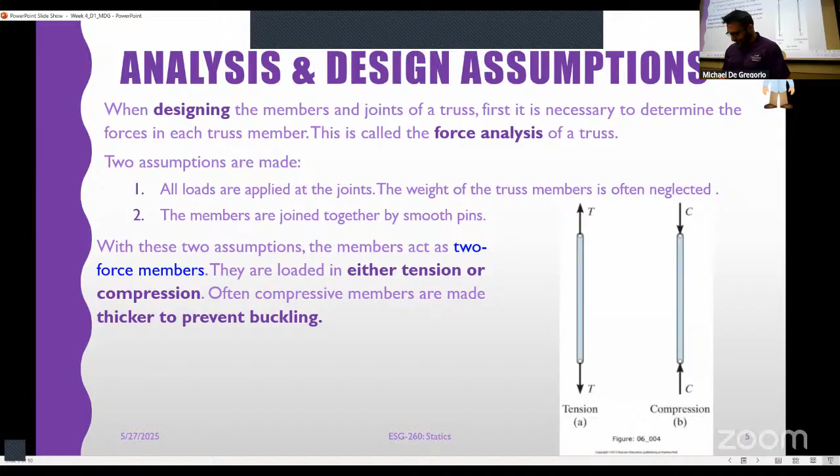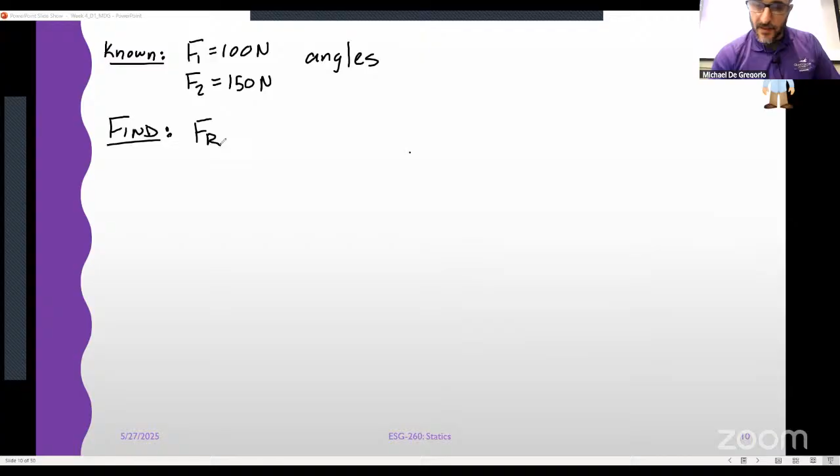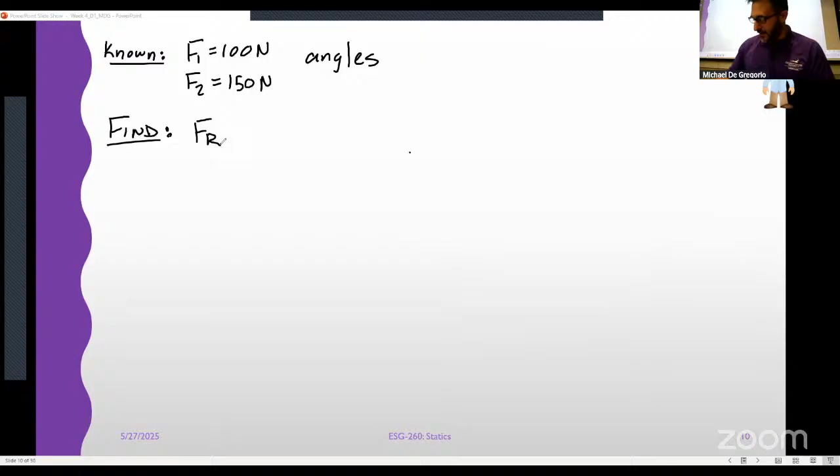What were we looking for? Our unknowns, or what we were looking to find, is the resultant vector. There's two parts to a resultant vector: we need its magnitude and its direction. You can write it in the Cartesian or rectangular form with the ij components listed out, or you can go a step further and find the magnitude and the angle from one of the axes. Either way is fine. Free body diagram.

Well, let me do it this way. Here's my point. That one was F1. Here's F2.

We know that that is 15 degrees, and this is 10 degrees. I think that pretty much does it. Just for completeness, rotations aren't going to matter here, but there we go. So if you had this or some version of this drawn on your paper, good job. You did it. You got 10 points.

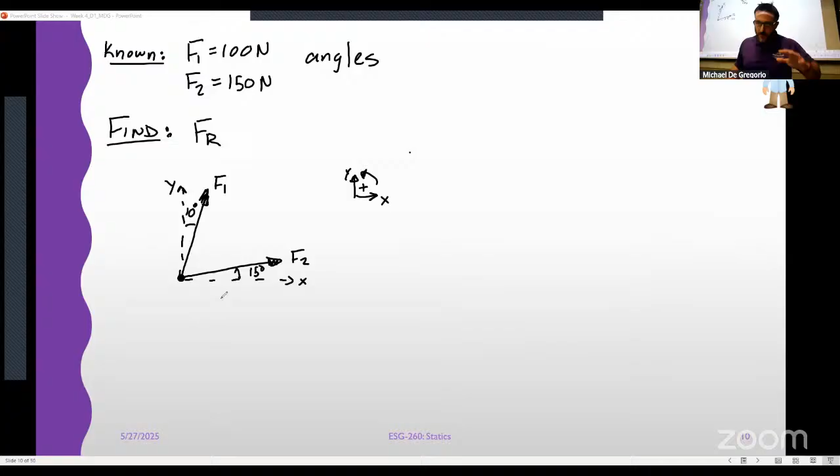Okay, so then the analysis part. So what do we do if we want to get the result? There's a couple ways you can attack this, right? You can write out what the force vectors are in their x and y components, and then sum the force components in the x direction and sum them in the y direction, and then put them all together. You can list what the vectors are individually. You can solve F1x.

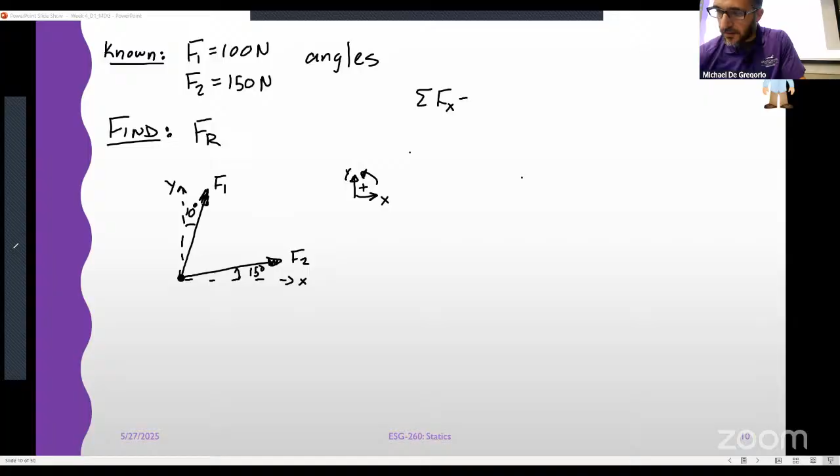The way that I did it was I started by summing the forces in the x direction. And I said that if I sum the forces in the x direction, I get a... well, I'm going to start by summing the forces in the x direction. Start with my x direction. So I've got F2 times the sine of 10 degrees.

I guess F2, I have F1 and F2 confused here. Let me just double check. Yeah, I wrote them backwards in my drawing. Oh, minus a point for Dr. D. One, there. There we go.

Some of you went the extra step and just made that 80 degrees from the horizontal because you didn't want to deal with having different sine and cosine, right? Because your OCD is showing. That's fine.

And then if we look at the y components together, we get... okay. So now we have everything else.

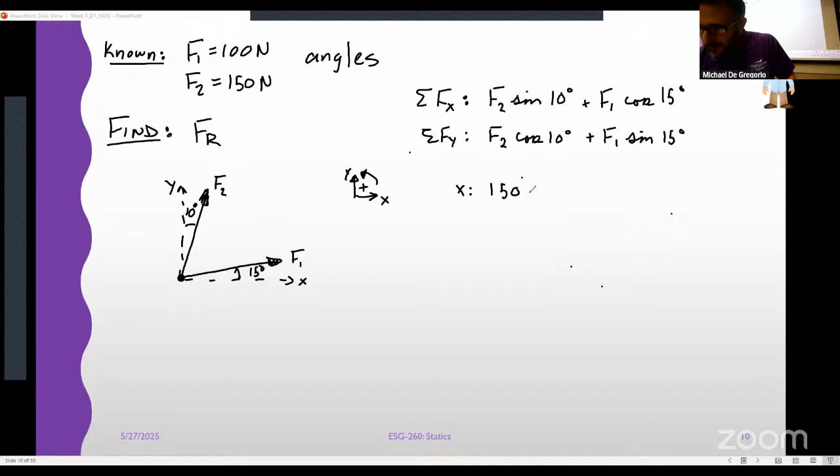Now we just plug in the forces and solve. So if I look in the x direction, if I plug in, I have 150 sine 10 degrees plus 100 cosine 15 degrees. You put those in your calculator, hopefully it was in degrees, and you get 122.64 Newtons.

Do the same thing in the y direction, and you will get 173.6.

I am carrying to 2 decimal places for now, and that's fine. I did not specify how many decimals. If you rounded up to have just whole numbers with no decimal, that was fine. Again, I am less concerned—I said this the day before the quiz—my concern is less about you getting the correct answer and more about me understanding your thought process. So small mistakes, say you kept F1 and F2 flipped, I would have taken off a few points, but the rest of my solution is correct based off of that change.

All right, so now last step, we got to put it together if I want the resultant, and I do, because that's what I was asked for. And I'm going to take the easy way here and call it a day.

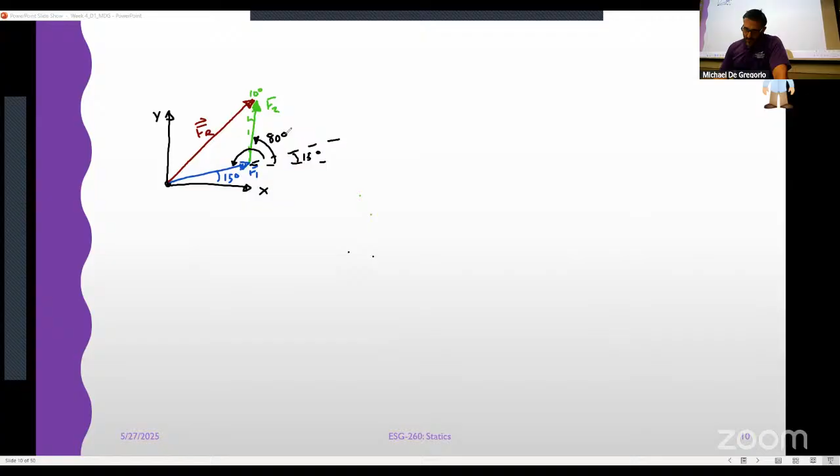Okay. Why is that important? Because it lets me get this angle in here, which is 65 degrees, because it's 80 minus the 15. Then 180 minus the 65 gets me the angle in between the green and the blue. So from here to here, that should be 180 minus 65, which is 115 degrees. So you have to kind of piece together what the angles should be.

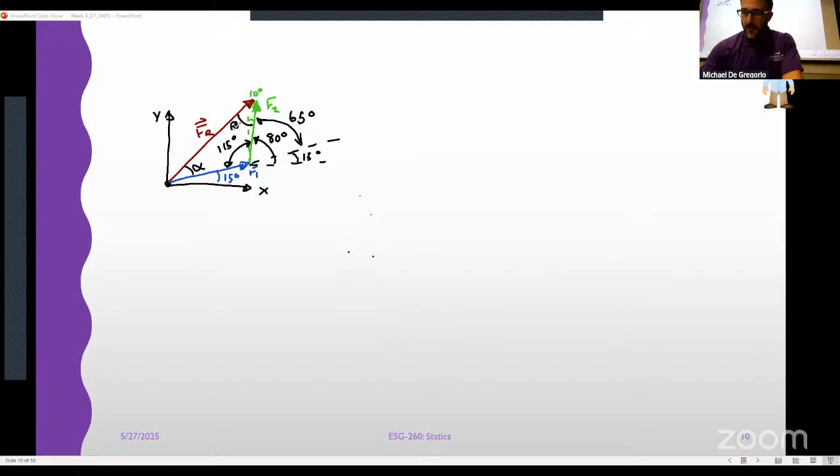Everybody tracking, making sense? We good? I'm going to label this one alpha and this angle up here beta. Then if we want the magnitude, FR, we can find it directly using law of cosines. I'll call that gamma. So what are A and B? A is F1 and B is F2.

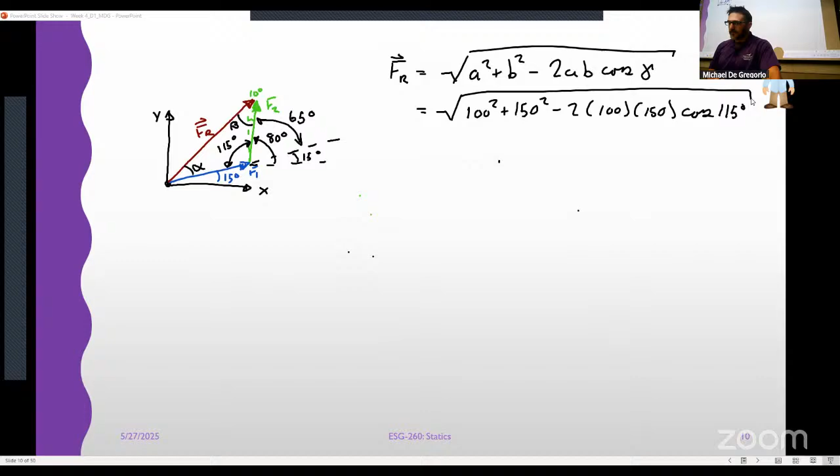Notice what happens when the angle is 90 degrees. You get Pythagorean theorem. That's law of cosines. And if you plug all that in, you get 212.55 Newtons, which, like I said before, if you go back and take our original vector, 123 and 174, square root of the sum of the squares, you get 213. Then we need the angle.

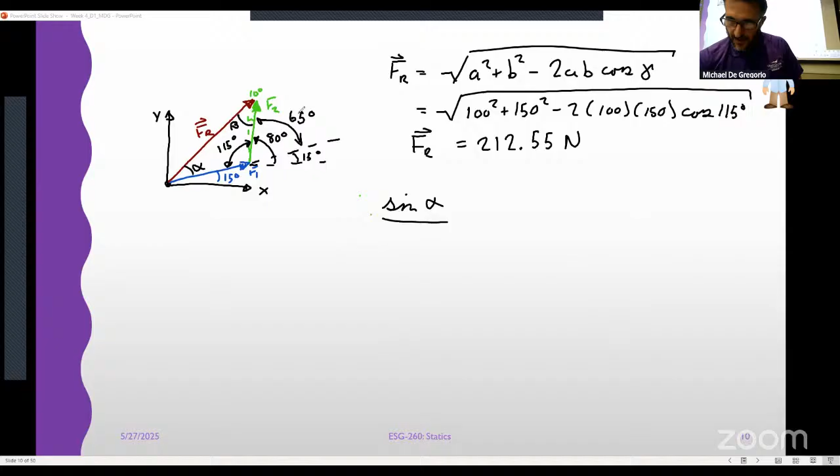So what do we need? We need alpha plus the 15 degrees, right? So how do we find alpha? Well, the sine of alpha divided by F2 is equal to the sine of 115 degrees divided by FR. Law of sines. We can solve this for sine alpha is F2 sine of 115 divided by FR, or alpha is the arc sine of...

F2 is 150, sine of 115 degrees divided by 213, and that should give you 54-ish degrees. No, sorry, that will give you 69 degrees. No, wait for it. Let's just do it. Okay, there. So that will give you 40 degrees.

And then you add the 15 to it to get the full angle, right? Because this is alpha, which is the angle between the F1 vector and the resultant. But if we want it from the x-axis, we need to add 15, which gives us 55. There we go. Great success. We did it.

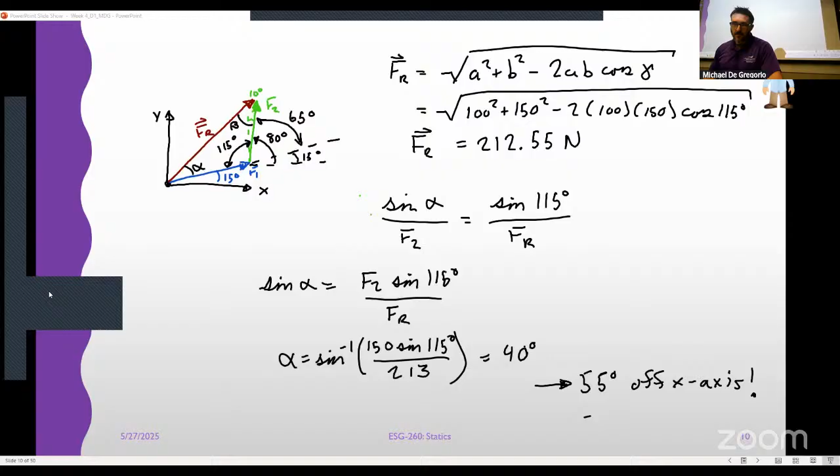Well, here's the second question then. Surprise, surprise, there is a 3D equilibrium problem on here. Not really a surprise; you should have expected this. And to boot, it's one of the ones that's going to need us to use unit vectors, maybe. There's a second way you can do this too, and that's fine.

So figure 2 shows you a package that weighs 500 pounds. The issue is that none of our engineers can determine the force in the cables that will allow for static equilibrium. Your mission is to determine these forces. So you need to figure out the force in the cables. This one was worth 65 points. Lots of points on the line for this problem.

Bless you. So where do we start? Well, first thing I asked you for was the knowns, like we start every problem. We know that the weight is minus 500 k pounds. And we know distances, not angles, just distances.

Things that are unknown or that we're being asked to find are the force in CA, the force in CB, and the force in CD. Okay. Next, we were asked to draw a free body diagram. Here's point C. We have our weight. That's going to be pointing straight down.

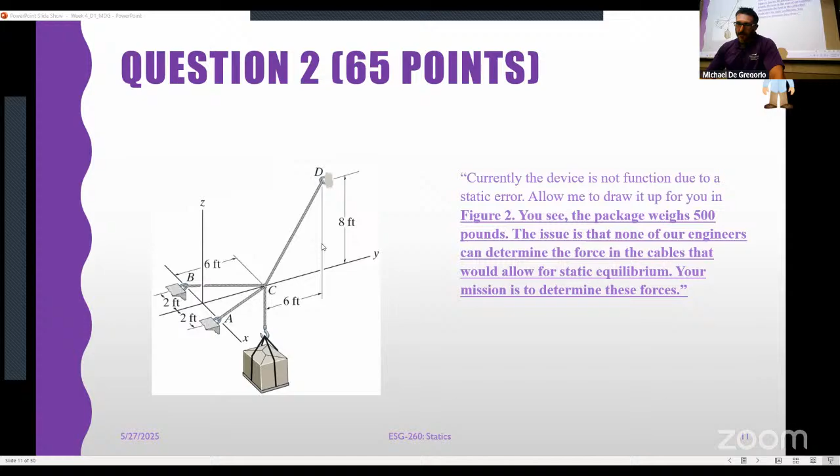Okay, that's great. Now what? Well, you can do this a couple of different ways. I opted to do it with unit vectors, which is how I'm going to show you how to solve it right now, okay? Which is also the way that we would have done it in class. However, some of you noticed that all of these are in a single plane. They're not, right? This is just in the YZ plane. This is just in the XY plane. And so some of you did it the trig way, because you can identify all of those. Because there's a 0 component for each of the forces in those directions.

But I will tell you that it takes about the same amount of work to do it either way, right? Because if you're going to do it correctly with a bunch of 2D drawings, you really want those FBDs in 2D. Otherwise, you're not going to stack your vectors correctly.

Okay, so I started by developing the unit vector for CD, which is the distance from C to D divided by the magnitude of that distance. If I'm going from C to D, there's no travel in the X direction. I have to go positive 6 in the J and positive 8 in the K, divided by the magnitude of that. The square root of 6 squared plus 8 squared is 10. Divide by 10. And so our unit vector, I'll write it up here for tracking: 0I plus 0.6J plus 0.8K.

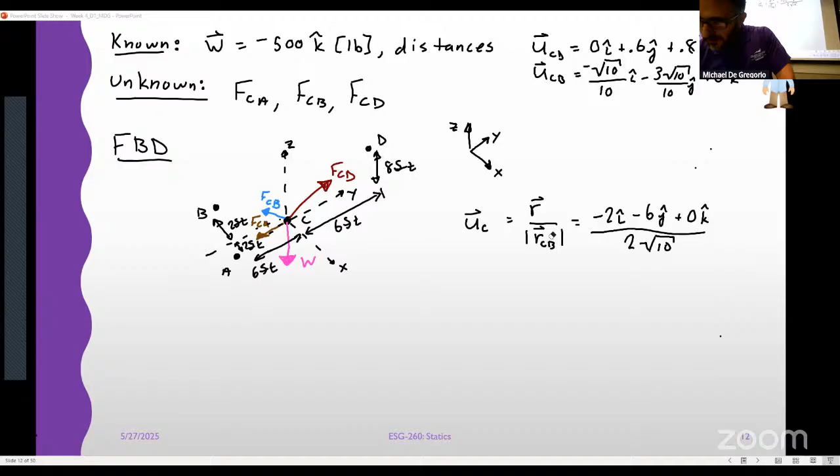Okay. And then guess what? We'll do A now. The fun thing about A is that that vector looks pretty much identical to the CB one, with the only difference being that it's positive in the x direction instead of negative, because they're in a line together, right? That's it. And so really we can just take this guy.

No, you're not gonna let me do it. Come on. Come on. That would have been so good. Apparently copy and paste is off the table in Zoom. I'll write them a message about that.

And the last, yep, and that's it. Those are our unit vectors, right? Cool. Everybody cool with unit vectors for that so far? Again, if you didn't do it with unit vectors, it doesn't mean that you didn't do it correctly. There are other ways to solve this. If you really wanted to do it with trig, you could have. But I would argue that it's roughly the same amount of work either way. Okay. Nothing? No questions so far. We good?

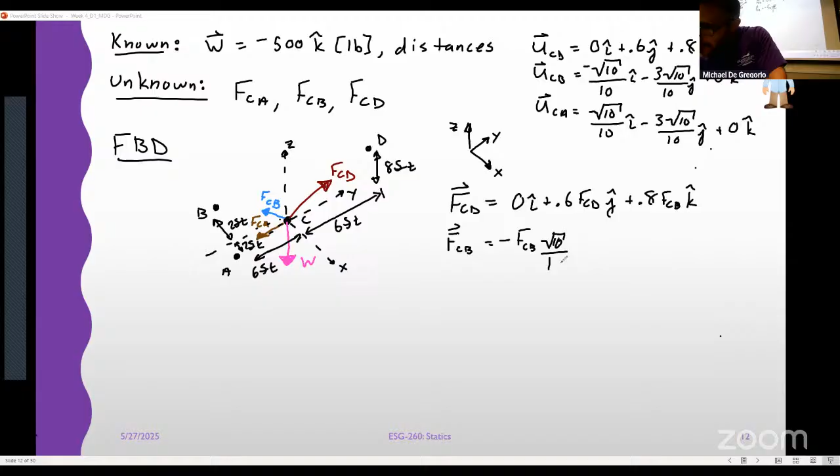So if I want to write down my force vectors, FCD should just be, let's see, 0 in the I plus 0.6 FCD J plus 0.8 FCD K. And we'll do the same thing for FCB, which would be negative FCB root 10 over 10 in the I minus 3 FCB root 10 over 10 in the J, K was 0. Okay.

Hey, Matt, a little loud. All right. Thanks.

Okay, same deal, going the other way. This one should look real similar to the one we just wrote down. The only difference is that the x component is positive. And the final vector that we need is our weight vector. Not negative 1500, but negative 500. Well, let's write it out just like the other ones for fun. 0i, 0j, minus 500k. Right, and these are all in pounds.

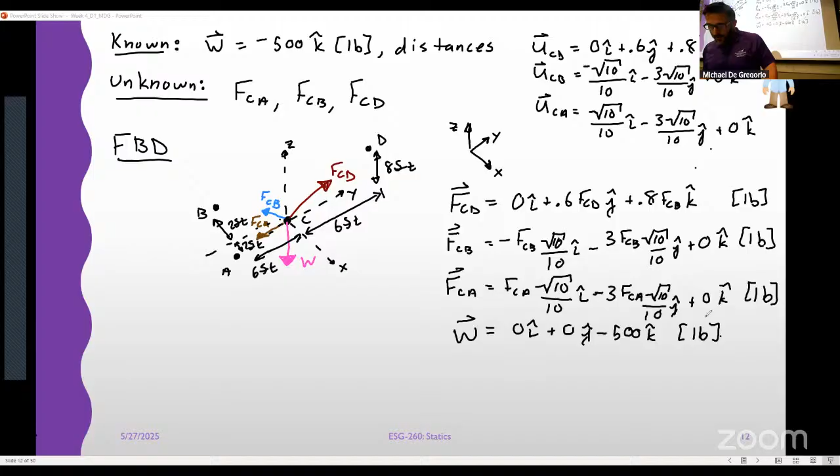Now we're ready to go, right? We've got everything set up the way we want it. Sum of the forces in the x direction, sum of the forces in the y direction, sum of the forces in the z direction. I'm gonna erase my FBD for now, so I have a little room to write the rest of this stuff, and we can still see the vectors.

So if I sum my forces in the x direction, I get negative FCB root 10 over 10 plus FCA root 10 over 10. The root 10 over 10 goes away, right? And so I just get FCA is equal to FCB, right? Keep that one as equation 1, moving along to F in the y direction. Looking down, this one's going to be a little bit more convoluted, right? But it's

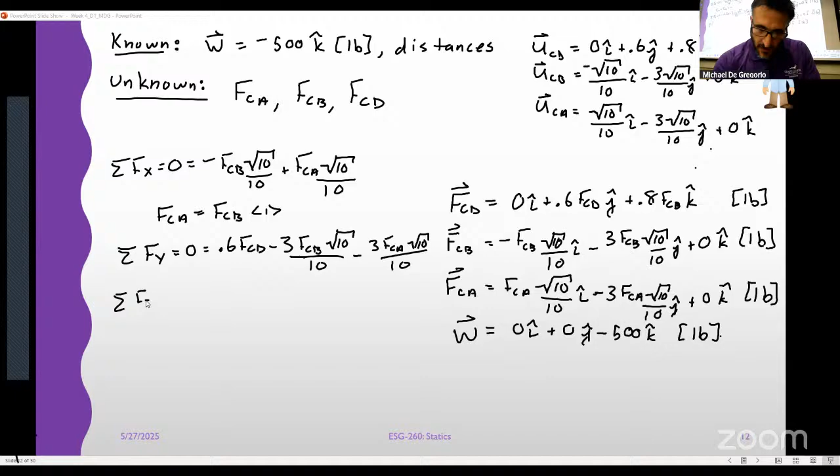okay. Yep. 0.6, yep. Nothing in the J there. We're going to leave that for now because there's really nothing I can do with it. But the next one, FZ, will be really nice because I only have two things in the K direction. I've got 0.8 FCD and the weight, minus 500. So we can solve that right away. FCD is 500 divided by 0.8, which is 625 pounds. That'll be pointing up to point D, from C to D.

Okay, we go back, right? We're going to have to do a two-part substitution into equation 2 over here. Pick whichever one you want to sub in for, A or B, it doesn't really matter because they're equal. So I subbed in FCB with FCA.

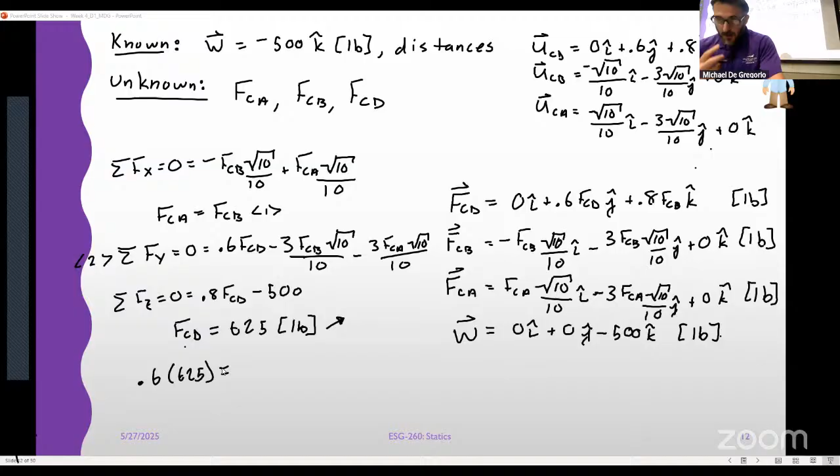If you do that and rearrange some things, you get 0.6 times 625 is equal. Then I move the other two over to the right-hand side because they're both negative. If I make them positive, and they're both FCA, I end up with 2 times FCA times 3 root 10 over 10.

You can say, well, why didn't you just make it 6 root 10 over 10? Could have done that too. It turns out that if you solve this for FCA, you end up with 197.64 pounds. Notice it came out positive, so we assumed tension correctly. FCA should be going towards point A, and FCB is just equal to the same thing, 197.64 pounds, headed in that direction.

And there you have it. Pretty straightforward, right? Again, if you wanted to do it with trig, you could totally do it with trig and it works out fine. Questions on that one?

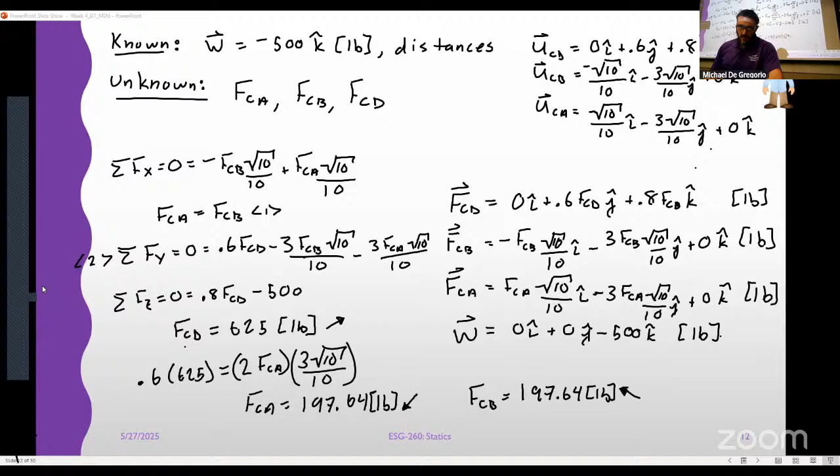Okay, this one's 30 points for a bunch of unit conversions. The biggest mistake I've seen so far is just flipping the conversions, not multiplying when you're supposed to divide, or dividing when you're supposed to multiply. That's the biggest thing I've seen so far.

Let's start here. Water has a density of 1.94 slug per cubic foot. Also, I'll show this off: pound per square foot is not the same as PSI. So if you solved this in PSF or PSI, I gave you points for it. I did not, because I messed up, so that's an error in your favor. There are two possible answers for this conversion because of that mistake. That does not extend down to part B, because there's a direct conversion in that chart that takes you from PSI directly to Pascal.

Anywho, let's walk through it. So we have 1.94 slug per cubic foot, and we need to convert this into density in SI units. What are the SI units for density? In general, what's a density? If I asked you to write the equation for density, what would it be?

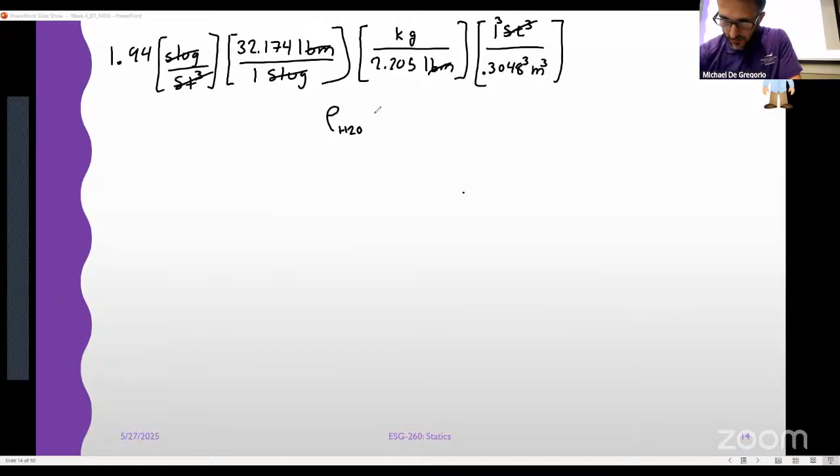When we multiply all of this together, we get that the density of water is equal to roughly 1,000 kilogram per cubic meter, but I wrote it as 999.66 kilogram per meter cubed. If you did it in centimeters, that was fine, I'll allow it, it's a valid measurement. This checks out with hopefully what you guys recall as the density of water from chem, or thermo if you've taken thermo, or really any science class that requires you to use the density of water. It changes depending on temperature and pressure, but anyway.

Anyway, okay, that was the first one.

The next one: the Pascal is actually a very small unit of pressure. To show this, convert 1 Pascal, which is 1 Newton per square meter, to PSI, which I then labeled incorrectly—my bad. Let me get myself some room here.

All right, so if I have 1 Pascal, which is 1 Newton per square meter, and I want to take that to PSI, I'm going to need that to be in pound per square inch or pound per square foot, depending on whether I use PSF or PSI, because Dr. D messed up. So how do we start?

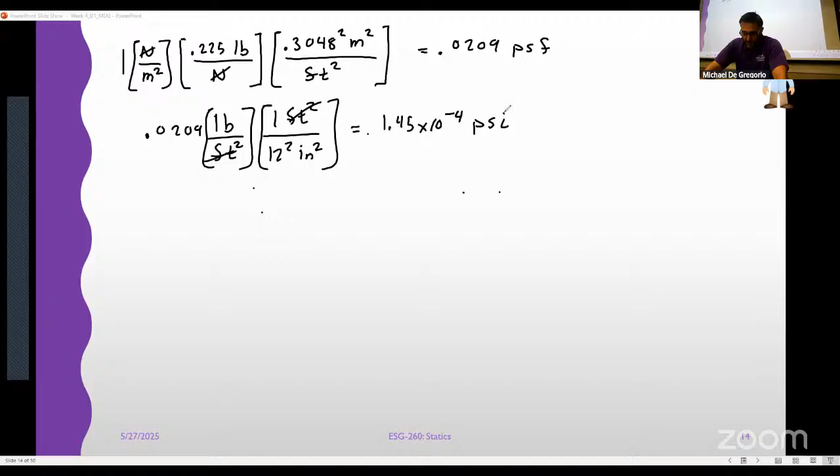The next one, you could either do this in reverse or just use the 6,895 number from the table to go back the other way. I'm going to do it the long way because reasons. Because I did it the long way. Because unit problems are fun.

14.7 in PSI, and I need to bring this to pascals. First thing I'm going to do is convert using the same conversion factor I used above, just flipping it to get rid of the pounds instead of using the newtons. Then we need to convert this from inches to feet. You could go directly from inches to meters if you wanted, but I just used the same things that we did in reverse.

Left with Newton per square meter. This is going to be a really big number, because I'm dividing by something that's a decimal being squared, so it's going to be much larger than 14.7. And in fact, it comes out to 101,270 Pascal, or 101.3 kPa if you're using kilopascal, depending on where you used your truncation. Hopefully that resonates, because if the atmospheric pressure at sea level is 14.7, hopefully you remember that 101.3 is our standard pressure in kPa for air.

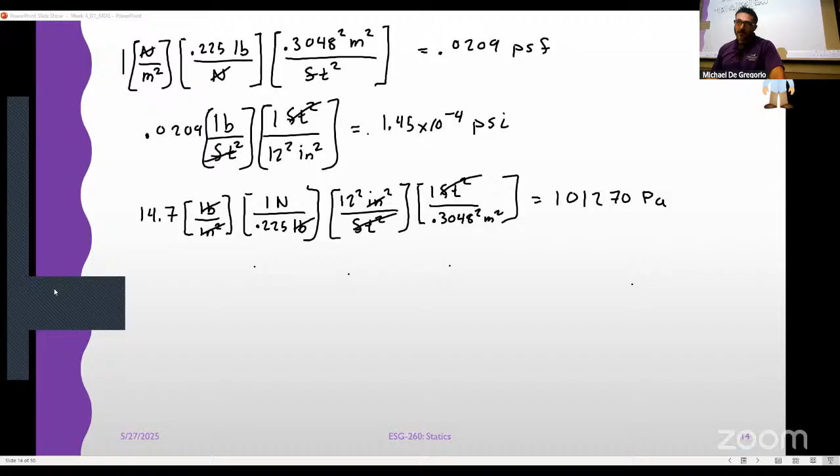All right, these are the more interesting ones now. A man weighs 155 pounds on Earth - that's pounds force, since it wasn't specified as pounds mass. But also, if it were pounds mass, think about how much that person would actually have to weigh in pounds force - it's a ridiculous amount. I'd argue no human has ever weighed 155 times 32.2 pounds. That's pretty excessive, so context clues. I guess it's possible somewhere in the MCU that we could have that.

So we're going to start with 155 pounds, and we're asked to find the guy's mass in slugs. There's one slug for every 32.174 pounds force on Earth - on Earth, that's the important part, that's true, it's going to come into play in a minute. This gives us 4.82 slug, and that's also a nice number for us to just keep around, because we'll talk about that in a second.

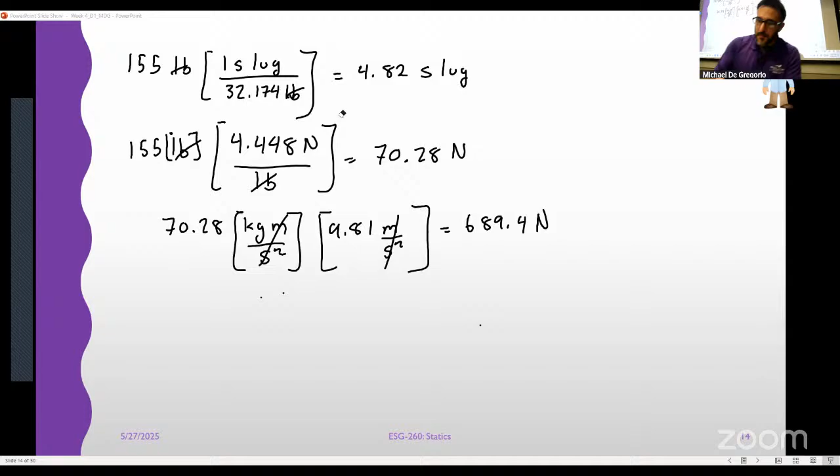And we get 689.4 Newton. I don't know why I converted that way, I did this all backwards. Okay, reset.

689.4 Newton. Take my newtons, 689.4 Newton, I want this. You know that this cancels with our meters per second squared, leaving us with kilograms: 70.28 kilograms. There we go, got it, nailed it, first try, there's no internet record to tell you otherwise.

Okay, last part. On the moon, how much does this person weigh in pounds? There's a couple of things that need to happen here, because now that you've moved to the moon, gravity has changed. You can either start with the 155 pounds, but then you have to remove the 32.2 and multiply by 5.3 to get everything together. Or you could say, I understand that mass does not change no matter where I am, right? And so the mass we found up here in slugs is 4.82 slugs.

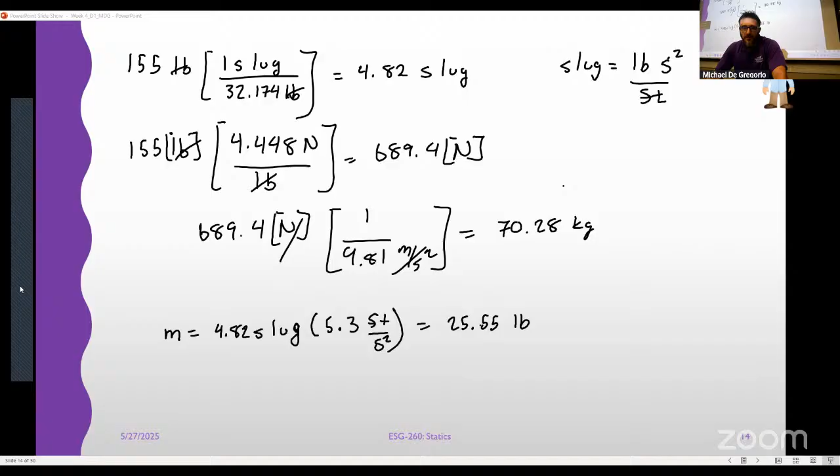And here's the last one, a fun fact about this particular problem. If you took ESG-162 with me, the only time I ever taught it, this was actually a problem on one of your quizzes, pretty much the same, I just flipped what we were looking for, that was it. And the reason I did that is because I told you during that time that this was a statics problem, and it is. It's 100% a statics problem, so I'm just proving it.

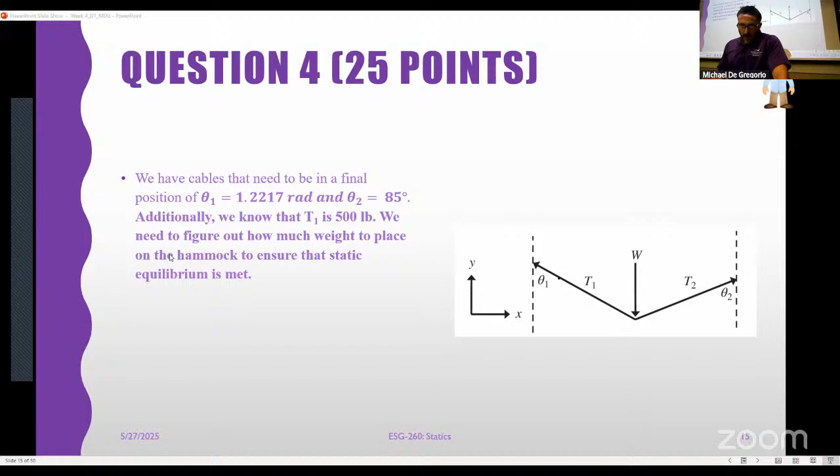So how much weight do we need to place in the hammock? Really we were just asked for W. This one was a little bit different, it didn't ask you for knowns and unknowns in an FBD, it just wanted you to write all the force vectors in Cartesian form. So this was the setup part: we acknowledge we have some weight in this direction, some tension T1 composed of X and Y components, and some tension T2. They should all be in pounds.

If I want to convert that angle, 1.2217 radians, into degrees, multiply by 180, divide by pi, that gives me about 70 degrees, 70 and change, but close enough.

We know theta 2 and we know T1, so let's start with T1, we'll write an actual vector for it. T1 is negative 500 times the sine of 70 degrees plus 500 times the cosine of 70 degrees, I and the J.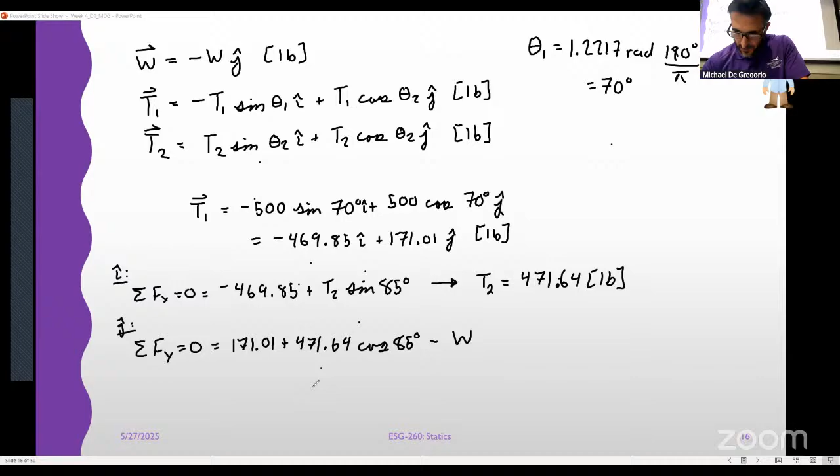And then in the J direction, if I sum the forces in the Y and set it equal to 0, I get 171.01 plus 471.64 times the cosine of 85 degrees minus W. So W, when we solve this out, is 212.12 pounds.

That's the whole thing. That's the quiz. Great success.

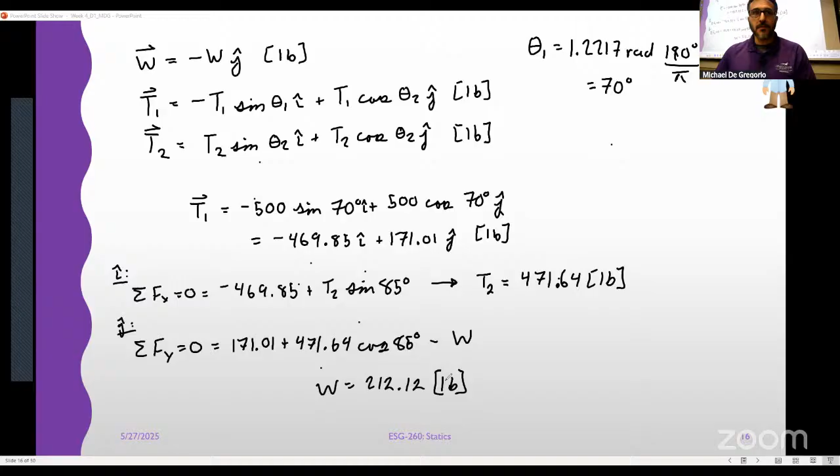When I took the quiz, it took me—I had originally an extra problem on there that I removed. The whole thing with the extra problem took a little over 30 minutes, but here we are.

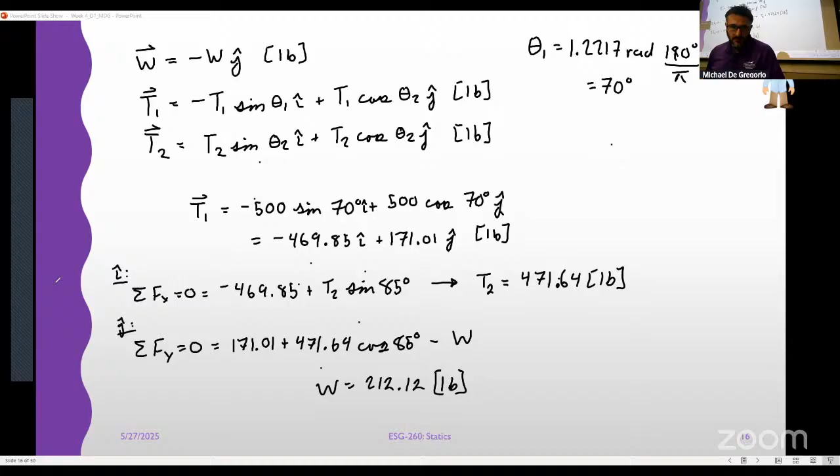All right, well in that case, let's revisit method of joints because it's been a week, and I'm sure you were all very concerned about method of joints over the weekend. But all right, so we have trusses, and we talked about this.

We assume that all of the members are massless, and we assume that they're frictionless pins, and we assume that all of the forces are applied at those joints, which are pins. So if we have a truss that looks like this, and somebody asks us to find the forces in each of the members and tell us whether or not they are in tension or compression, we do that.

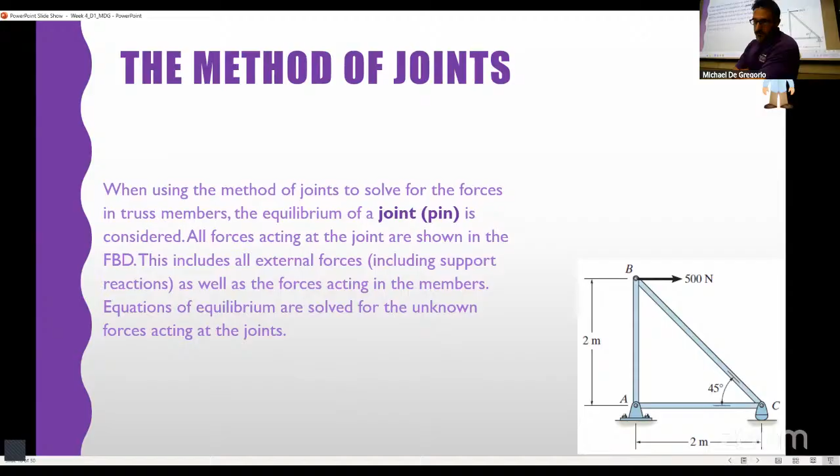By drawing a free body diagram at each of the pins and summing the forces in the X direction and summing the forces in the Y direction. As we treat the pin like a particle, and because we're allowed to rotate around the pin, we don't really worry about the moment. We don't use the moment equation. Also, right, and so that's neat.

If we're going to assume—you notice here that they did not assume that everything was in tension. They drew FBC in compression. That's fine. Again, you can draw them in whatever direction you want, but the typical convention is to assume tension for everything until proven otherwise.

All right, steps for analysis. First, we start with an FBD for the entire system, which allows us to find the reactions and get a global perspective for what the system is doing. Then we do each of the joints.

Which joint? It really depends on you, wherever you want to start is fine. You don't typically have to solve n joints to figure out what all the forces are—you can do n minus 1, but the last joint serves as a way for you to check. So we'll do some of those in a little bit.

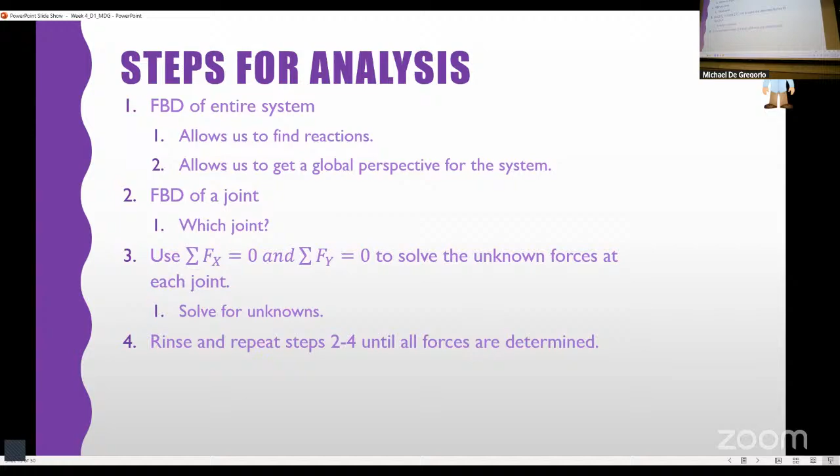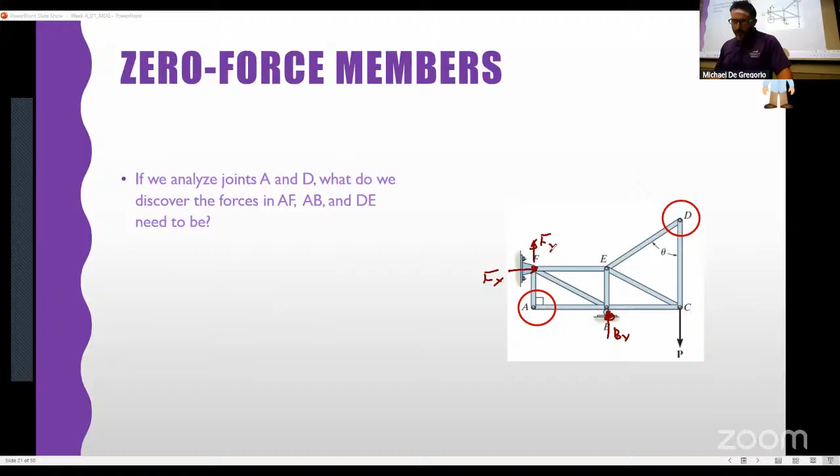Notice that we have a roller at B, right? So a roller at B is going to give us a vertical force or a normal force at B. Let's do this real quick, just to remind us all. Here's BY. We have FX and FY. So what do we have to do here?

If a joint has only two non-collinear members, and there's no external load applied or support reaction at that joint, then those two members are zero force members. So if they're not in line with one another and there's no reaction or external force at that joint, there's no force.

Another way of thinking about this is look at point B. You have a force going up this way, one coming up here, and two coming out to the side. The only applied force at joint B is the reaction that is completely vertical. If I were to sum the forces here in the y direction, I only have two things, two ways this can transfer. In the x direction, the sum of the forces in the x direction is zero. There's no forces being applied in the x direction.

Okay, you can prove these, and we will. In this example, DE, DC, AF, and AB are all zero force members. So DE, again, pulling down at P, straight down. This has - if you look at C - you're going to have Y components here and here, but no...

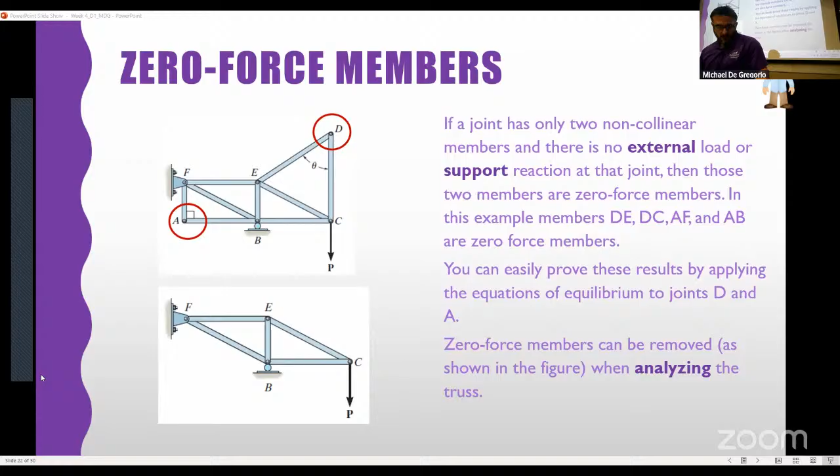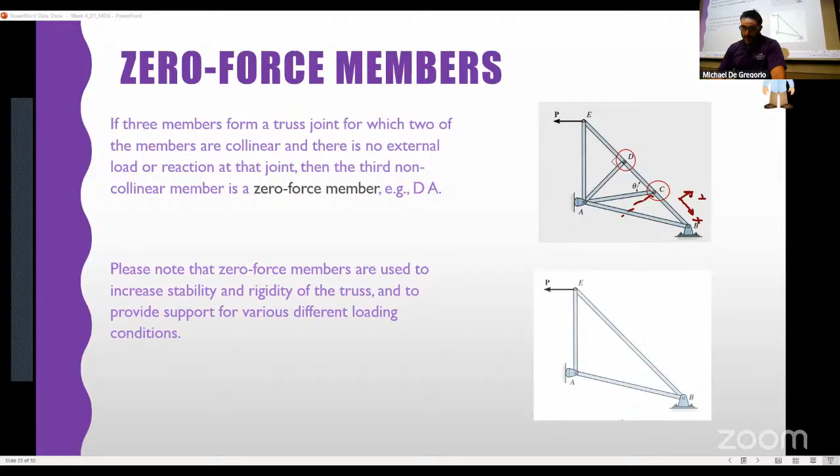So does it simplify things? Yes, if you can do it up front. Is it necessary for your success for solving problems? No, it is not. And if you have any questions about whether something is a zero force member or not while you're working through problems, I would recommend just do the statics at the point and see what happens. Right? That's what I would suggest.

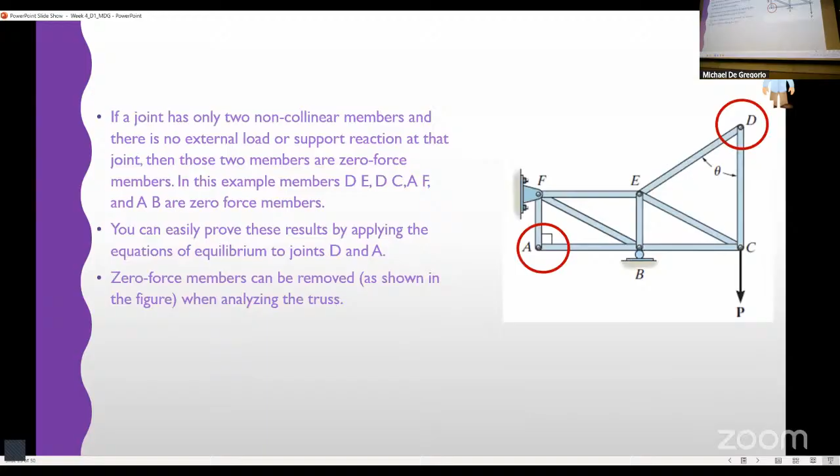Okay. So let's walk through this one, right? We talked about it, but so we're going to analyze D and A, right? Or did we already do this? We already did it. Okay, great. Cool. Let's just do this problem. Where is it? There we go. Very good. Did we do this one last class? Do you guys have this in your notes? Okay. I just want to make sure. No, you guys did this one last time.

Okay. Excellent. So determine the reactions and forces in all the truss members. Do not forget to mention whether they are in tension or compression. All right. This is going to be pretty much the standard for the homework for stuff. It's about structural analysis, right? Trusses. Is this homework four? Yeah, this is the homework four stuff. Okay. So method of joints, method of sections, right? Method of sections next class.

So since this is method of joints, and typically when we're asked to determine the reactions and the forces in all of the truss members, that's going to require us to do method of joints, right? If you're asked to find everything, method of joints is your method of choice. If I want the reaction forces, well, the first thing that I'm going to do is draw a free body diagram for my entire system, right? So I find it easiest to draw all my points first and then connect them. But you guys can do whatever you want.

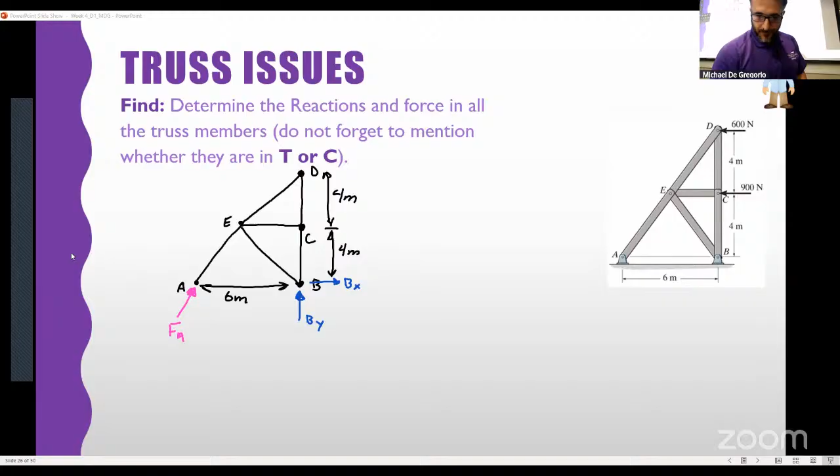Yeah, so we're going to use a trick that comes out in our favor to reduce the number of unknowns. And it's fine. You can do this. It's totally legal. I'm just going to call this FA and say that I know it has to be pointed along the member. Sure, you say so. This is 6 meters. This is 4 meters. And this is 4 meters. We have some applied forces here: 900 Newton and 600 Newton.

All right. So we get three equations, and that's great. I'm going to call one thing out here before I do anything else. Notice that this is a 6, the full total, if you did the triangle ADB, right? That is a 6-8 triangle. Some people would call that a 6-8-10 or 3-4-5. Recognizing that this is a 3-4-5 triangle is really helpful for later. Or you can find the angle if you want. It doesn't really matter.

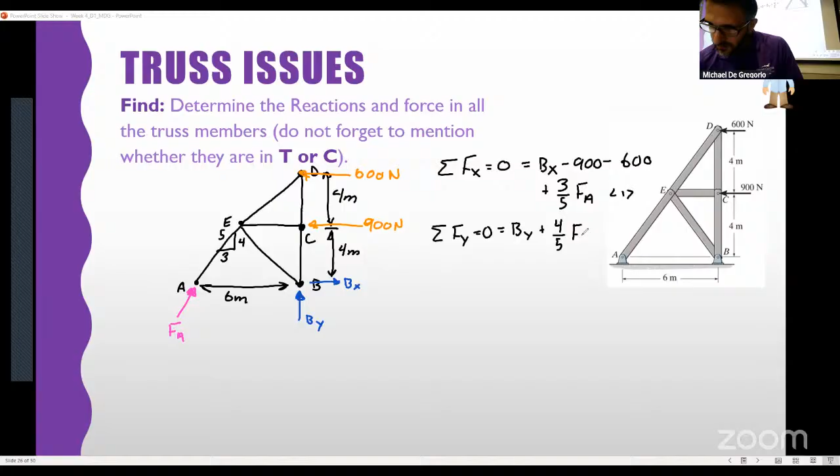So if we're going for reactions, let's start. Sum of the forces in the x direction is equal to 0 is equal to Bx minus 900 minus 600 plus the x component of A, right? And the x component of A is going to be 3/5 of FA. Equation 1. Do the same thing in the y direction using the components. It turns out that we're going to need a moment equation. Where would you guys pick to take the moment?

I use point B. Using the De Gregorio principle of where to pick moments, I pick point B because Bx, By, and FA in the x direction all pass through point B, eliminating 3 of my forces. Okay, if I want the moment established by 900 newtons, that's positive 900 by 4, because if I were to push with 900, it goes in the positive rotation direction. Same deal with the 600, also positive, but that one is 8 meters away from point B. And then the final one that we have is A.

A pushes up, right? So that's going in the negative direction. So we will subtract the y component of FA times 6 meters. We can solve this right away for FA, and that cracks open the rest of the problem. So that gives me 1750 Newton. It's 900 times 4 plus 600 times 8 divided by 6 times 5/4, obviously 1750. I mean, it's like asking what 2 plus 2 is. All right, easy. This came out positive, so it is in fact directed up and to the right. Okay.

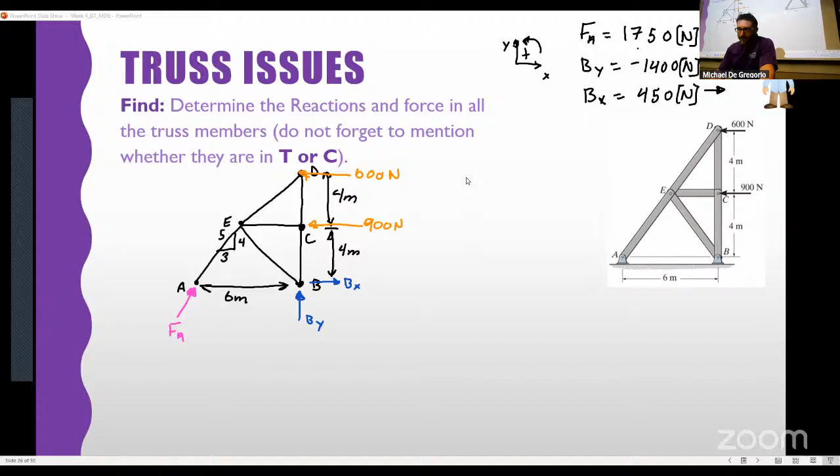C has 3, so C is probably not the best one. We know that's not a zero force member right off the bat because there's a force at C and 2 that are collinear, so all of these have to be taking load. D has 2, so B and D are looking pretty good. E, not so much; E's got 4 different forces. You could go A, but A's only got 1, so it's not interesting. We're pushing along A; all that force just goes right up to E. FA is FAE. I started at D, but you can start at B for sure. All right, so let me draw my free body diagram at D.

Here's joint D. I'm going to have FDE coming down this way, named cleverly because it goes from joint E to joint D. I'm also going to have a force that comes straight down called FDC. And we have an applied force there of 600 Newton. And just to remind ourselves, X and Y in these directions.

Okay, we don't know either of these forces, so let's start with our sum of the forces in the X direction. I'm going to sum the forces in the X direction, set that equal to 0, and that's negative 600 minus, well, we know this is that same triangle that we're using before. This is a 3, 4, 5 for sure. So that's got to be 3/5 of FDE. So we can find FDE right off the bat.

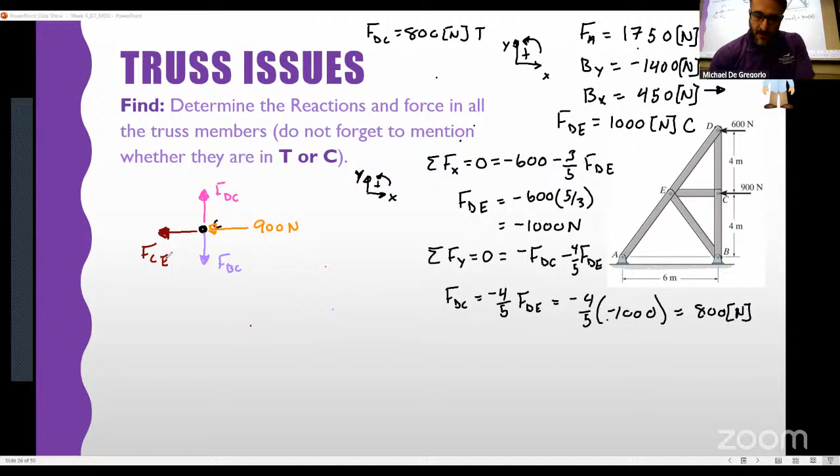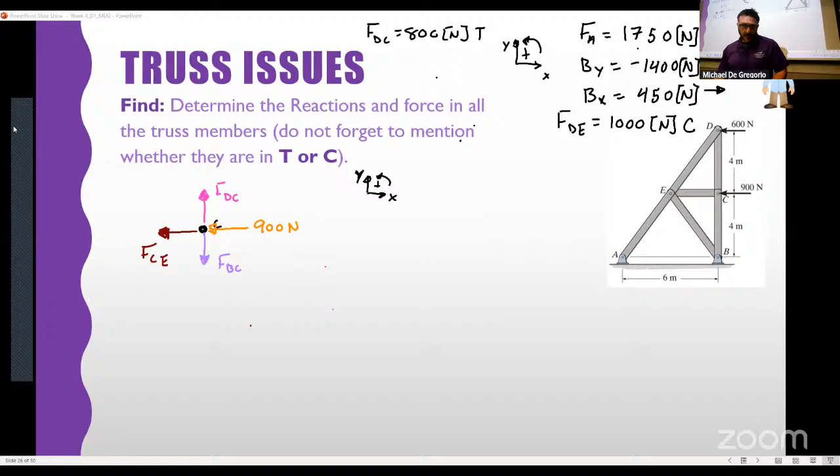This one is a pretty easy one if you're just looking at it, right? Because FBC should equal FDC, and FCE needs to counteract that 900 newtons. The X component, since it's pure X and pure Y, it transmits in that way, right? And so if we were to do the math, which we will, because that's kind of why we're doing this. I should probably go to the next slide so I don't have to keep truncating what I'm writing.

So let's sum the forces in the x. Negative 900 minus FCE. That's in compression, right? So write it down up here. Notice that when I report it, I don't report the positive or the negative. I'm telling you, hey, it's compression or it's tension. That's enough to understand. So that means that that's actually pointing the other way, which makes sense because, again, two of the members are completely north-south, two are completely east-west. They have to balance each other, right?

So if we sum the forces in the y, we get FCD or FDC. Let's call it FDC, I guess. Minus FBC. So FDC is equal to FBC, which makes it 800 newtons in tension. So far, we have this guy, and this guy, and this guy, and this guy.

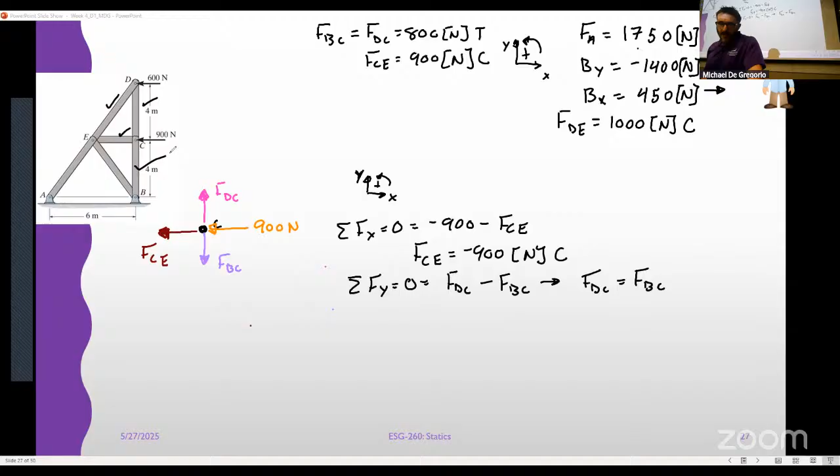All right. So now, and I would also argue that we have FAE, but we'll use that as a check in a second, because I'm gonna go to joint E now. Why am I gonna go to joint E? Because I can just finish this right off the bat with joint E. Joint E is going to require us to make an assumption that's not drawn here, but we're going to assume that that is 3 meters, so that this triangle is also a 3, 4, 5. Yeah.

How would I know to do that otherwise? I mean, you're kind of forced into it at this point because there's not enough information given. Based on the way this is drawn, I think it's a reasonable assumption, right?

Could you do all of the geometry? I mean, yeah, you could, right? You could figure out this angle and then know what that angle is. Then you can use this angle because you know that these two angles are the same. And so then you know that this has to be 90 degrees maybe, right? I mean, you can work your way around to figure out what the actual angles are. I think it's just safe to assume there's a 3, 4, 5.

4, 5. All right, so let's draw the picture of the free body diagram.

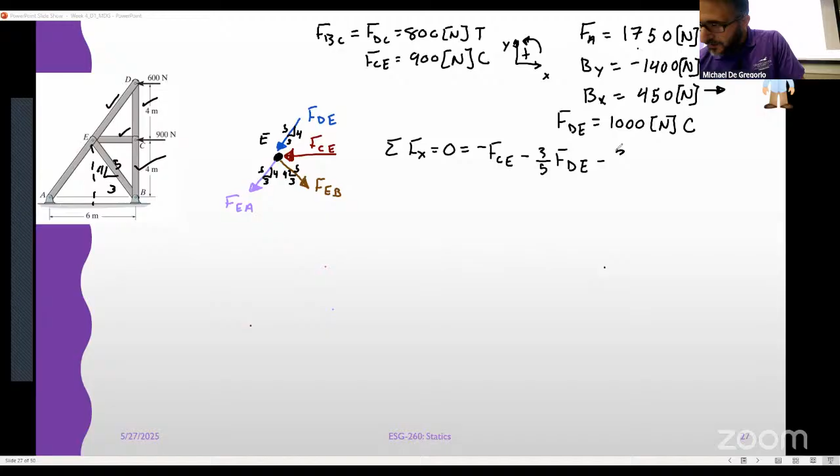So now this is going to be a lot more trig, right? We have negative FCE minus 3/5 FDE minus 3/5 FEA plus 3/5 FEB. Does everybody see? Very comfortable with that.

We know two of those quantities, but we don't know the third. So we're going to keep going. We're going to need the second equation. Two unknowns still. In the y direction, well, we have negative 4/5 FDE minus 4/5 FEA minus 4/5 FEB. The 4/5s are all just going to go away, but we'll get there in a second.

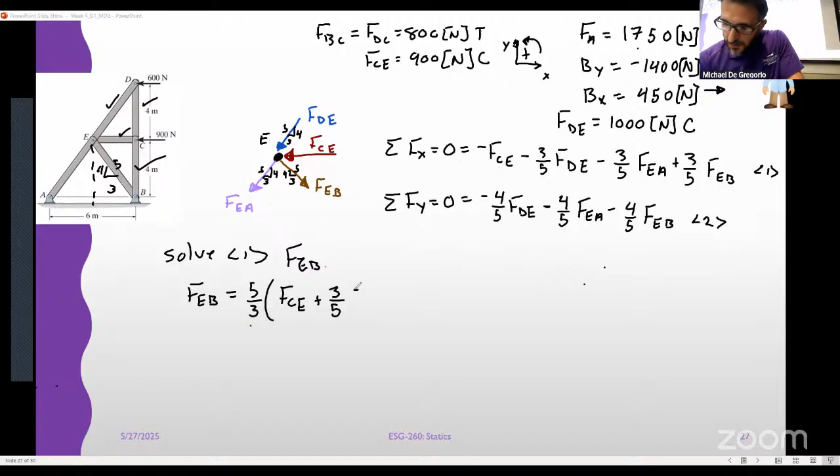So in this case, we're going to have to solve one and plug it into the other, right? So we'll solve equation 1 for FEB. Doing so tells me that FEB is equal to 5/3 times FCE plus 3/5 FDE plus 3/5 FEA. Why did I choose to solve number 1 for FEB? Well, because everything else is negative, and if I just move it over, I don't have to deal with negative numbers. It should just all be positive, right?

That's why. No other reason. The nice thing about the 5/3 is that it'll cancel this and this, right? And so if we wanted to rewrite it as 5/3 of FCE plus these things, we could. Or you could leave it also. It's fine.

Let's plug in some of the known values, right? FEB is equal to 5/3 FCE plus, well, FDE, going back up here, is 1,000 plus FEA. FEA is unknown still, right? No, we got FEA, did we? FCE, thank you. Looking in the wrong spot. 5/3 of 900, which is 1,500, right? Yeah.

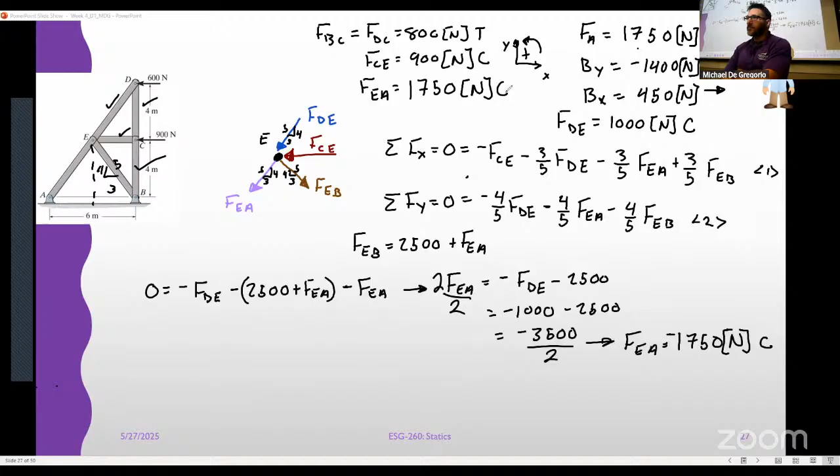So let's run a check using joint B. Everybody good with this so far? Time consuming, tedious, I would argue not particularly difficult. The setup is tricky if you have to figure out geometry, for sure. But otherwise, I think you guys are all capable of running through this. It just takes time.

All right, joint B. Here's joint B. We'll do it this way where I know what BY and BX are. And then we also know FBE, which I didn't write down... FBE came out to be 750 newtons in tension, correct?

We didn't solve it last time. I erased it before we solved for it. We had to plug back in to get FBE. My apologies, I was so focused on FEA. So where did that come from? Let me run it back real quick to show you.

So we take this and we put it in here. Once again, this value, negative 1750, goes in here. And that's where we get our positive 750 newtons in tension.

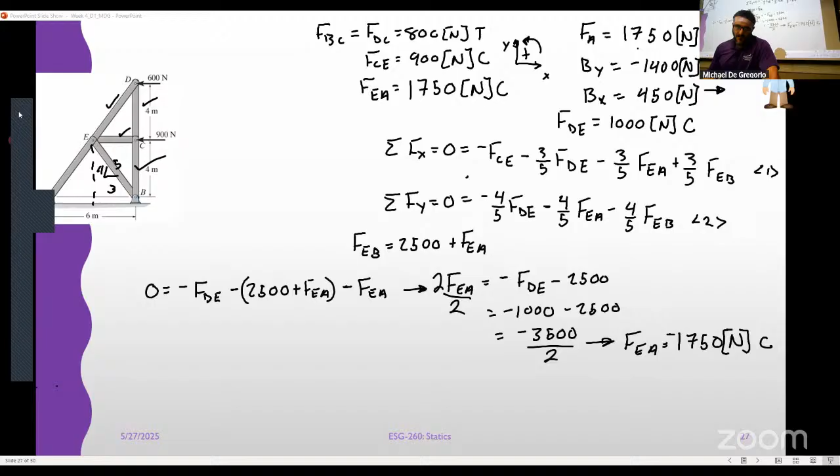Yep, this is where I live now. No? Okay, that's all we have. Very good, perfect, all right.

So now I got FBE, which is 750 newtons, and we know that that is a 3, 4, 5 triangle. And we also have FBC, which we know is also tension, and that's 800 newtons. Very interesting.

So let's start off, we'll sum the forces in the x direction, and that equals 450 minus 3/5 of 750. Okay, 3/5 of 750, that's 450. Oh my gosh, it worked.

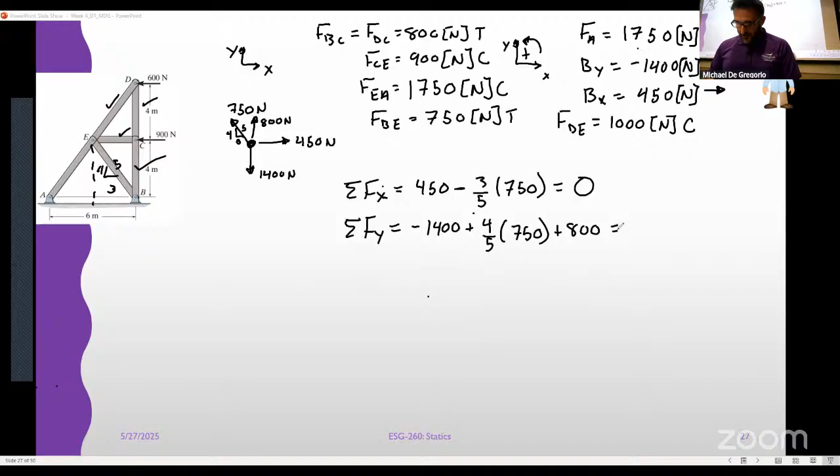Let's sum the forces in the y. Negative 1400 plus 4/5 of 750 plus 800. 4/5 of 750 is 600, plus 800 minus 1400. Did it. Check complete. That's the easiest way to check.

If you wanted to check that you actually found the reactions correct, you could do that too, and make those BX and BY. But you already found, you did that the first thing.

Now what would happen if you found out that wasn't zero? Well, it means you did something wrong, so you got to start hunting. I would start by looking at your reactions, make sure you did those correct. Because if you did those incorrectly, the rest of these calculations don't really depend on those reactions very much—we didn't really use them in any of the calcs we made. So hopefully not too much else is messed up. But you're going to have to walk through your process, make sure you got everything documented correctly.

What time is it? We got 30 minutes. Man, time flies, I tell you.

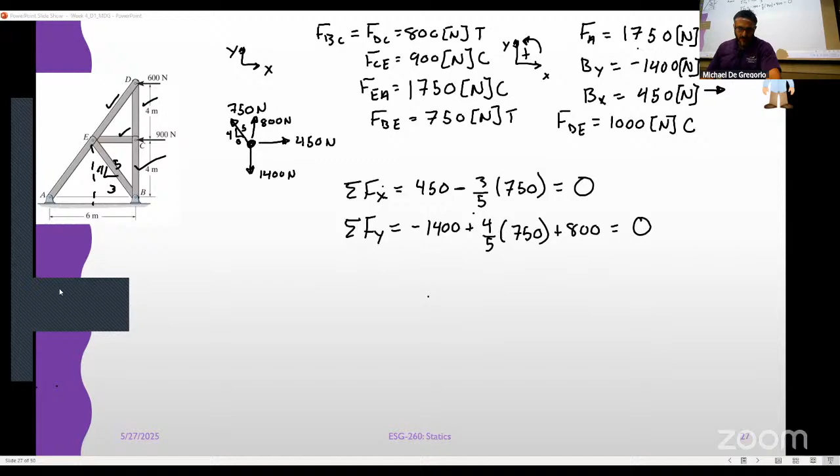I want to try something. All right, we're going to try something different today, because reasons. Does anybody have any questions on method of joints so far? No? Remember: find the reactions, go through the joints, sum of forces X, sum of forces Y. That's where we need to be. Okay, so we're gonna try something different.

Like I said, before we do that, let me share this problem with you guys. If you want to go back and try to do this one, this is a good practice problem. We're not going to do it right now because I want to try something different with you guys real quick, but here's one that you might like.

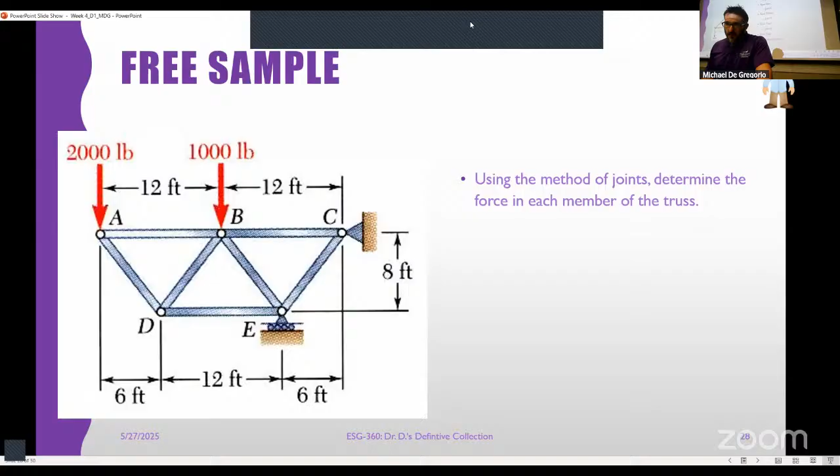Okay, this is what we're going to try today with our remaining 30 minutes, and I think we have enough time if I can unfreeze the video. Okay, this is what you're gonna do. You're working in your rows. You guys are gonna work together in your rows to do specific tasks.

Row one, you are going to work on finding joint D, the forces in the members attached to joint D. Row two, you're at joint C. Notice some of you might need input from other groups. Row three, joint B. Row four, joint A. And row five, you're going to find the reaction forces of the entire thing to start.

Okay, so we're going to work on this right now. So get together in your groups. Ideally, you're going to determine whether or not these members are in tension or compression. Row five, you're going to need to go first.

Actually, row four is going to need you guys to be helpful because otherwise they're going to have too many unknowns. Sorry. Row five, you go, you guys got to be working on reactions. Give your answers to the groups when you find them.

Right, everybody else start working. Get equations so that when you are tasked with when you get the answers from the other groups, you will be able to move on by just plugging in.

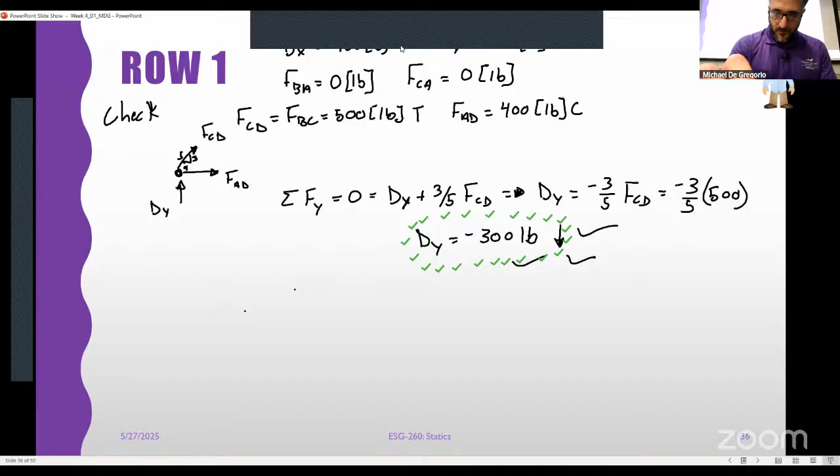Row 5, did you guys finish reactions? Yeah? Since we got 10 minutes, let's go through it. All right, so someone from row 5—right, we got reactions here, right?

So what'd you do? How'd you get the reactions? What did you get for the reactions? Let's start there. What did we get for the reactions? Somebody, don't be shy, just tell me the numbers. What'd you get?

How many reactions are there? Let's start there, how many are there? Three, yeah, but row 5 specifically—that's what I need. Since row 5 found the reactions and they told me that they found the reactions, it would stand to reason that somebody would be able to tell me what they are. Grant, what you got for me? What's up, three reactions. What are they?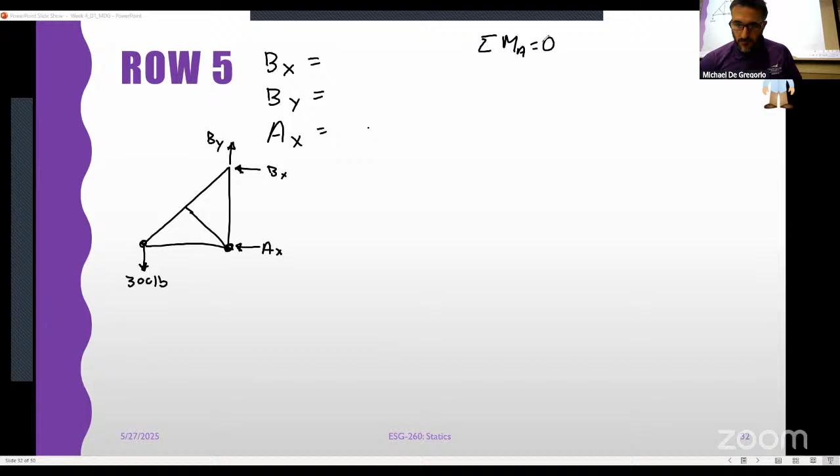Yeah, right, nice. And those look good from a positive, negative standpoint. Is everybody cool with that?

So when you solve for BX, what do you get? 300 times 4 divided by 3, 400 pounds. And it came out positive, so you have it in the right direction. So you're going to keep it to the left.

Great, good stuff. Then what? What did we do after that?

Okay, cool. So we got to flip the direction of that one, right? So this is actually 400 in that direction. That makes sense because if one's going one way, the other one's got to be a couple, right? Pull it the other way.

Great, then the final. And that makes sense to us because that should be counteracting what's pulling down. Right? Great, awesome, good stuff.

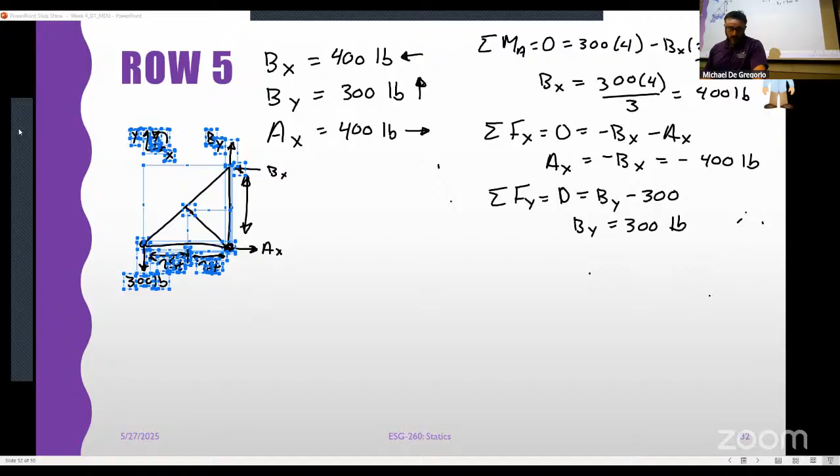Cool, good stuff, thank you. So next up, since we did that and we got all that good stuff going, where should we go next?

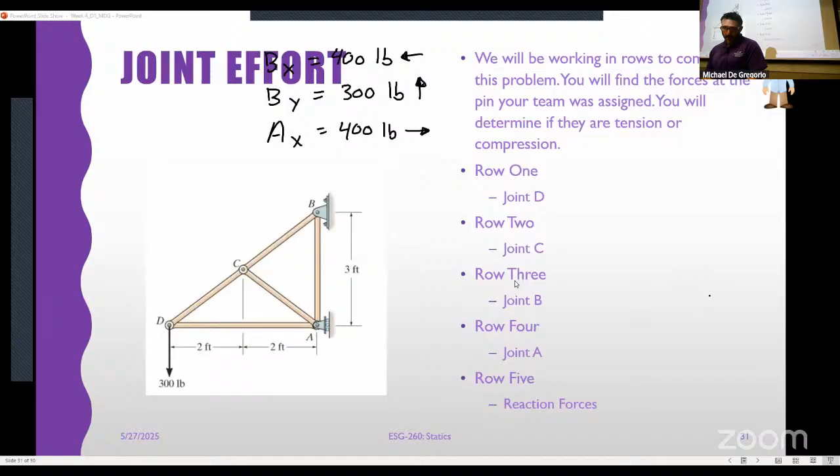That's a great question. I'm going to leave those forces up there. We're going to go to row 3. In row 3, you guys did joint B. So joint B, what do we got?

Probably you started with a free body diagram, right? And you got the reaction forces from row 5, maybe, based on these reactions, right? Maybe you had it in the opposite way, but we'll use what row 5 has given us. And then should have something like that. We'll call this one FBC, and this one FBA. That's joint B.

Okay. Someone from row 3, what are we doing? What's our first step?

Yeah, right. So, okay. Okay. Yep. Yeah, you got it.

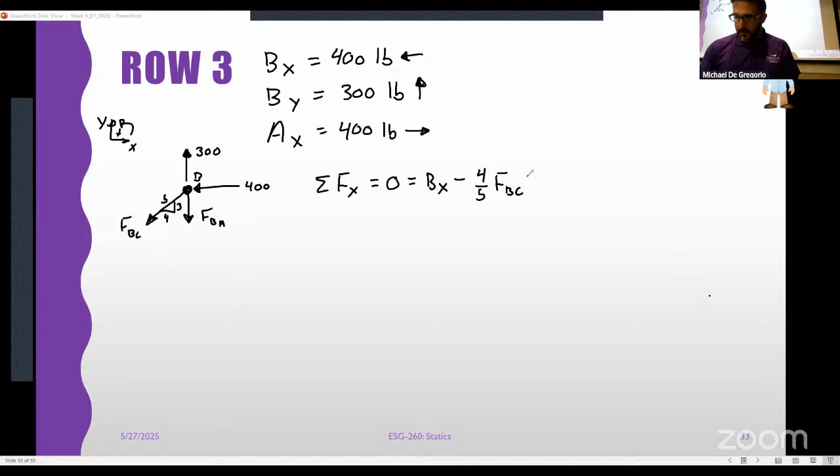So yeah, you got that, right? And so you had it going positive, right? Just to reflect what we were saying here. That's fine. And so you solve for BX. What'd you get for BX then? Or no, you solve for FBC, sorry, not for BX.

Well, yeah, this would be 400 times 5/4, so it's 100 times 5, 500. And that tension or compression?

What happens if we do it with a negative here, right? Well, then you end up with FBC, right? So we have a negative BX is equal to 4/5, right? So you end up with negative 500. So if you had it there, you would have to flip to compression, right? So if your reaction is pointing the other way, it flips the sense of tension or compression, right?

But the number stays the same. So if it is drawn for the way that Barrett discussed it, right, we had it drawn that way, right? Again, AX and BX, they can be flipped. All that's going to do is change which ones of these we have in tension and which ones we have in compression. It will cascade throughout the rest of it, right? But that's fine. Okay.

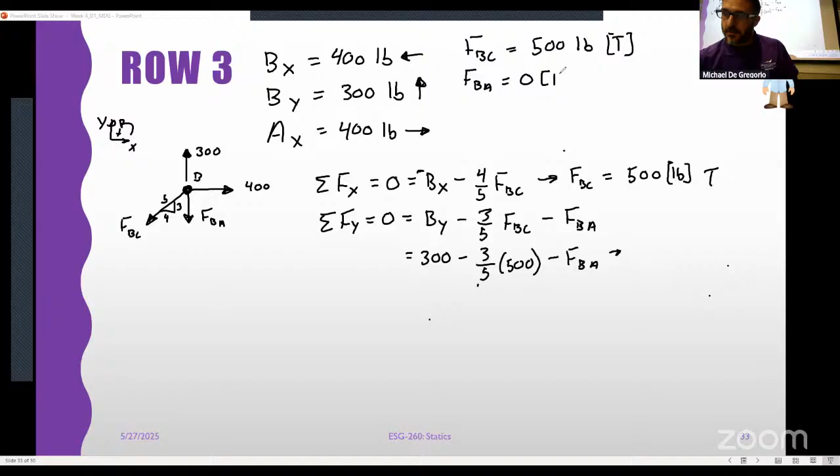Well, we got 300 minus 3/5 of 500. All right, so this is 300... interesting... 0 pounds. We found a zero force member.

How are we supposed to know by inspection that that's a zero force member? That's a tricky one. It's a tricky one because there's external forces applied at the joint, right? It just so happens that that happens in this case. It's not necessarily one that you're going to be able to pick out.

What if we had used 400 pounds at point D instead of 300? No longer a zero force member, right? Because 3/5 of 500 is certainly not 300 pounds, right? So it just so happens it's not one of the ones that we would necessarily indicate.

Okay, great, so we got that. We got FBC, we got FBA. It's looking good. What next? Next we're moving. We are moving somewhere. Where are we moving?

Row, one second, be ready. I know we're going over, but we're doing this thing. Row 4. And row 4, if I remember correctly, you have joint B. Joint B. Yeah.

That B. Yep. Wait a second. Row 4. So we did 5, 3, 4. Joint A, that's the one. All right, let's do joint A.

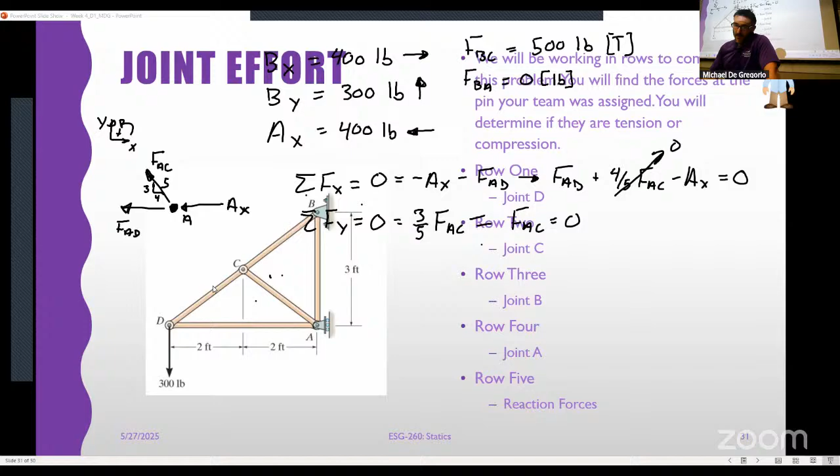Okay, great, that doesn't help us. I know FAC, so what's in the y direction? 3/5. Are there any other components in the y direction? How else are we supposed to know that? That is one of the ones we're supposed to know, but not by looking at joint A, by looking at joint C. If you look at joint C, what happens? Let me show you. They are collinear at this point, right, with nothing being applied at C. So FAC is 0. We went at it backwards, but there we are.

Okay, so now we know FAD is just equal to AX, right? Which means that it's going to be, so negative FAD, excuse me, negative FAD is equal to negative, or FAD is equal to negative AX. So FAD is equal to 400 pounds in compression.

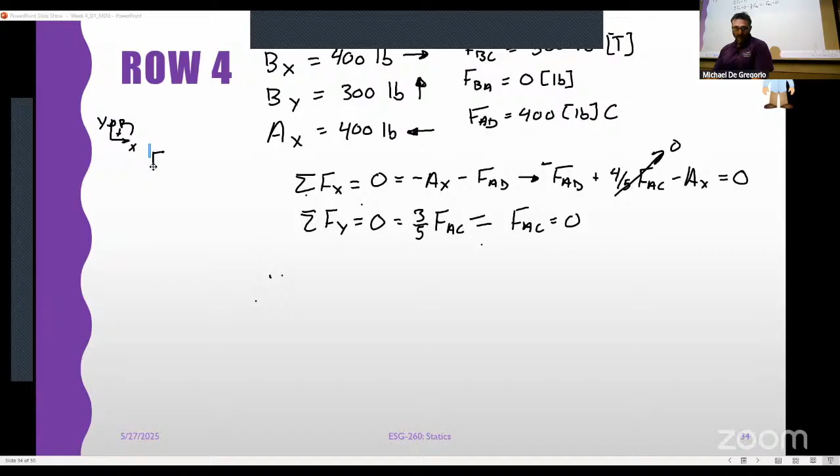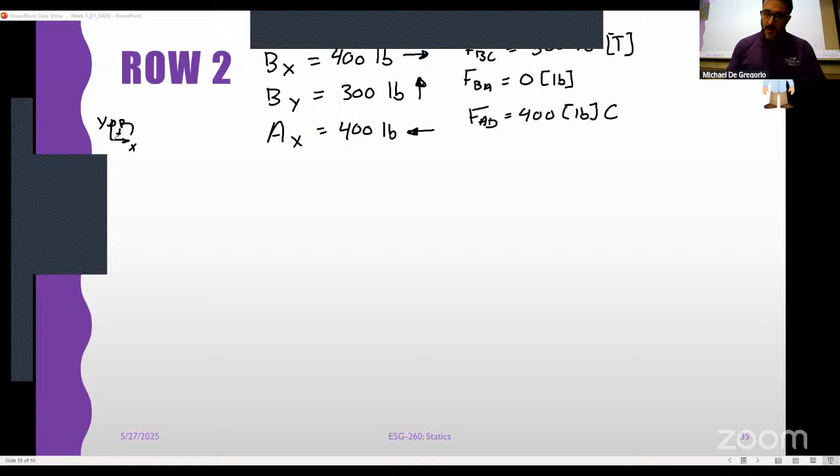Okay, we have to do one more, and then we've got all the forces that we need for this. And it's going to be row 2. Row 2, you guys had joint C, so let's talk about joint C. Here's joint C. I know these forces should be pointed in these directions. What's that? CB, BC, and FCD. FCA is 0, so I'm not even bothered drawing it.

Let me ask you a question. What is the missing force? We know FBC, what is it? FCD, right, and what does it equal? So I want you to look at this for a second. What if I used a different coordinate axis just for this part, just for this free body diagram? That would be an interesting trick that feels like cheating, but isn't, because remember, coordinate axes are arbitrary, and you get to choose them. And this one makes it really easy to see that if I sum the forces in the x direction and set it equal to 0, I get negative FCD is equal, or pardon, plus FBC is equal to 0. So FBC is equal to FCD, hence up here equal FCD.

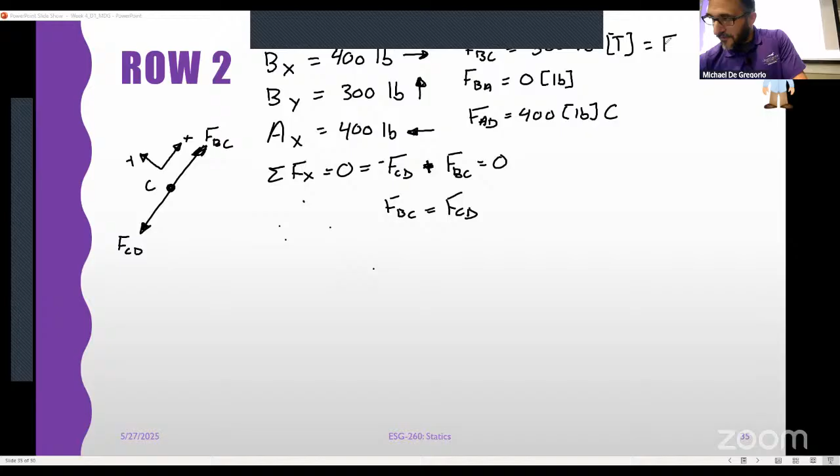And we finish it. And then row 1 can do the check, right? Because if we went through it, we could check out and make sure that everything equals 0 at that point. Or you could take out the applied force of 300 pounds and check that that equals what it is.